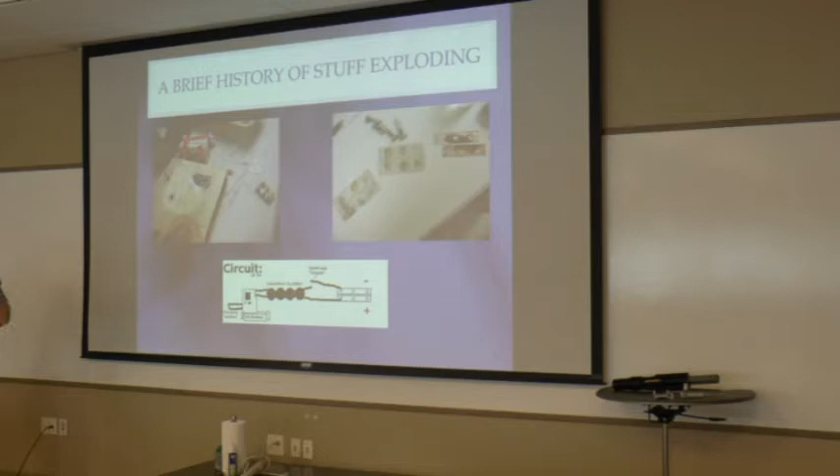A brief history of some of the stuff I've done: my interest in railguns actually started back in high school. I made a little physics demo out of a couple disposable flash cameras, some pieces of copper, a flash charging circuit, and some AA batteries, and it shot a little piece of aluminum foil out. That was my first railgun, I guess.

This probably won't play, but if you click it, it should play the video. Yeah, there we go—you can see it shot a little piece of aluminum foil and knocked a piece of paper over. That was off of a AA battery and about 9 joules of energy.

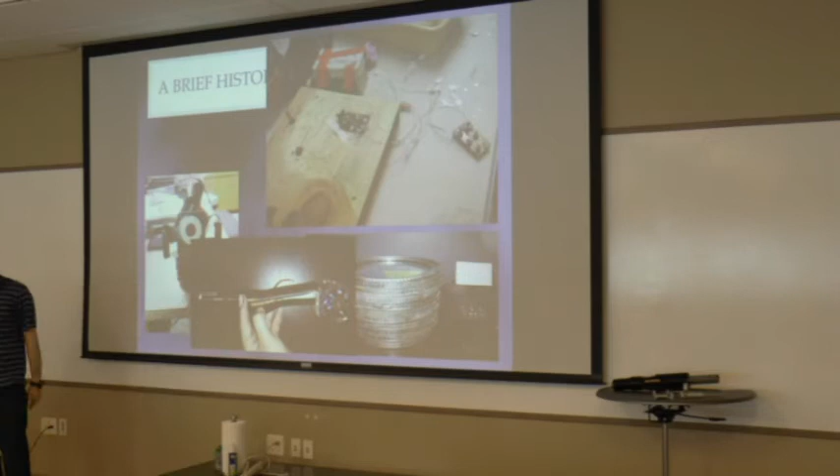So I did that, and some other projects. I did a little inductive charging thing so you can charge your phone while you're driving. I made some of the first LED headlights for a car using a weird thermal management system. I also made some little art projects, compressor mirrors, stuff like that.

I also made a rocket engine for Discovery Channel, as well as some composite materials I developed for one of their shows—they were making a man-portable bunker.

I also did some stuff at the Naval Postgraduate School. I made a wireless mesh network that was wearable. It had a computer in it that would monitor your heart rate, body temperature, and a bunch of other stuff, and it created a wireless mesh network so you could transmit your vital signs to other people wirelessly, even with no cell coverage or radio signals, because it was extremely low bandwidth.

I also came up with a wearable battery. It uses electroconductive Velcro, so essentially all you do is take the battery, slap it on wherever the terminal is with the electroconductive Velcro, and it just runs.

I also did some work for AFRL on novel solid rocket propellants. We took some nanoparticles that reacted with light and used that to make one of the first restartable solid rockets—a solid rocket that you can start, stop, and then start up again. There's actually a video if you want to click that little button.

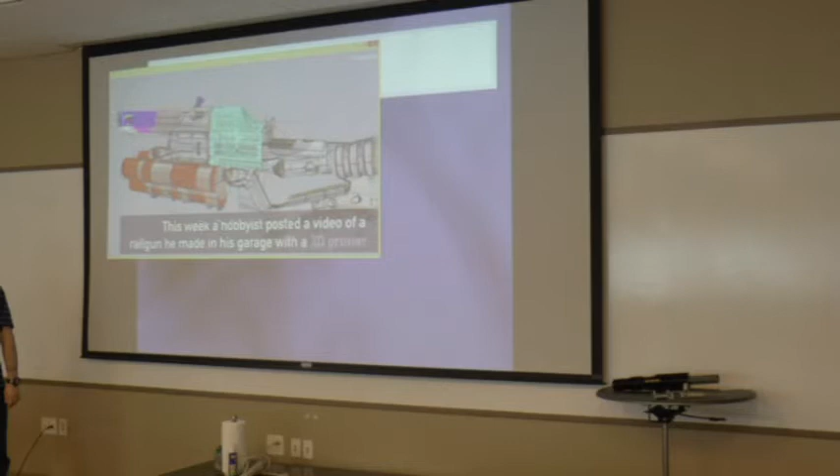Fire aluminum, graphite. I actually did tests with iron, tungsten, and non-conductive materials like Teflon, so it can fire anything. I can even push it. Let's just repeat it. Yeah.

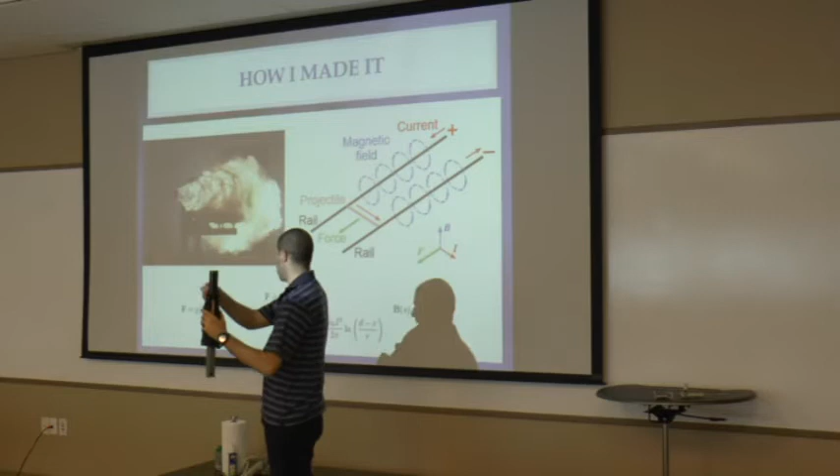Okay, so I'm not going to go into the math, but I'll explain how it works. Essentially, what you have - and this is the new version of the thing, so I apologize for it not being exactly what you saw in the video - but essentially what you have is two parallel rails, and you run a current between them. That current creates a magnetic field. And the interaction between the magnetic field and the current running through the rails and through the projectile creates a force. It's called the Lorentz force.

And it accelerates the projectile pretty much as fast as you want to go, because there's no limit on how much energy you can put into this. It's just how much energy you have stored electrically.

So the Navy, in their designs, had as much energy storage as they ever wanted. They could put a ship's worth of energy into this thing. But for a portable design, it's all about efficiency - getting the most bang for your buck. You only have a certain amount of energy you can store based on the efficiency of your capacitors. So you need to figure out a way to get the most force out of that specific packet of energy.

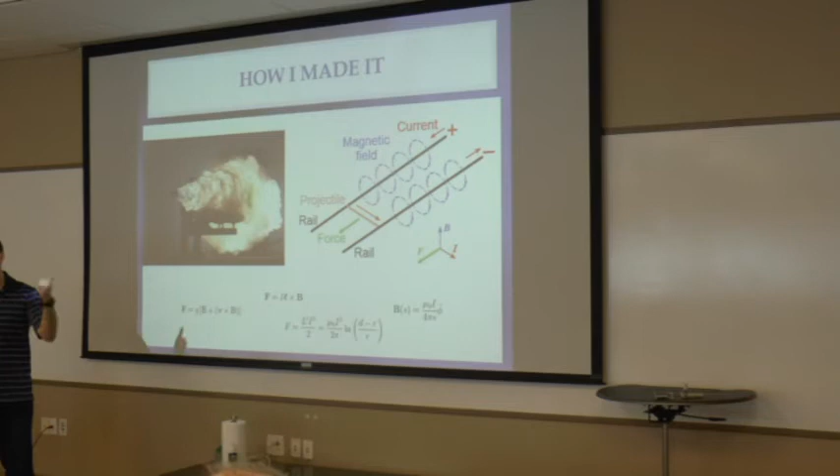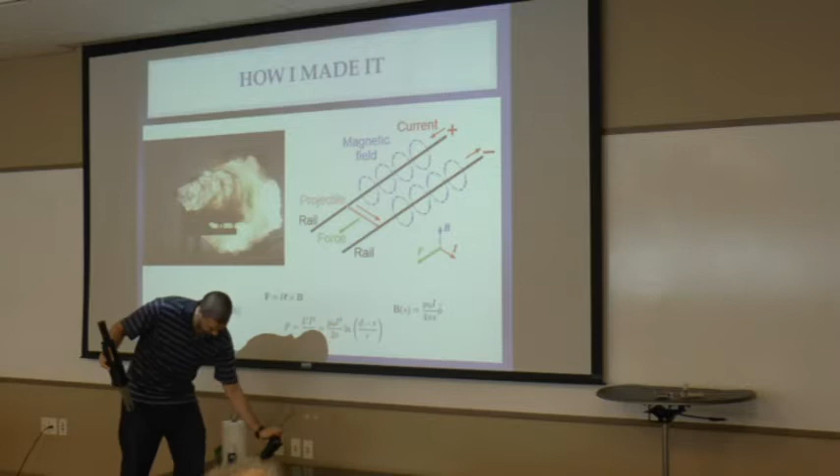So the way you do that is you augment the field. Instead of having just the rails creating the magnetic field, you have an external magnetic field - here you have 4 magnets. Essentially this creates a linear B field around the rails, and that allows you to get a much more efficient rail design. That allows you to make a portable railgun.

So how I started this thing was I submitted a white paper, because originally I was like, I'm not going to do this just on my own. I'm going to ask for funding and see what was going on. So I submitted a white paper. I said, here's how I'm going to build it, here's what I want to do. And if you look at how it developed, it actually worked pretty well - it came out pretty close to how I thought it would work. I'm not going to go too much into that, but the people I submitted the white paper to said, no, we're not really interested, we don't think you're going to be able to do it. So I was like, all right, I'll try it anyway.

So here's actually what I made, and here's how it works. I'm going to talk about the rails. This took me about 6 months to get it right - 6 months to figure out how to make just this part. Very difficult.

And I originally went with a 12-inch rail because I was like, all right, bigger is better, longer rails - what's cooler? But no, that's not how you do it. You have to match the length of the rails to the amount of energy you have stored. I also found out manufacturability is a big problem - you can't just machine stuff into any shape you want. You have to think about how you're going to manufacture it.

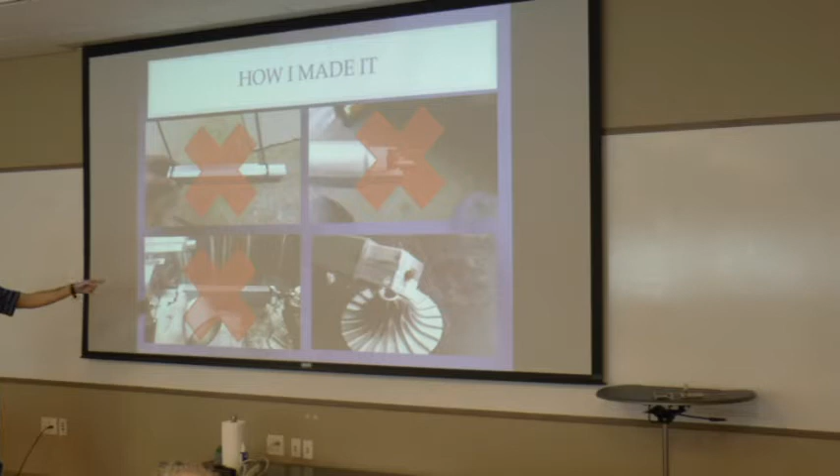So originally I wanted to go with a circular thing, and it turned into a square because I couldn't figure out how to do a circle. But eventually I got it to work. I found out a lot of ways that it didn't work, especially duct taping a thing on the lathe and trying to turn down a thing tied together with duct tape - it's not good for lathes.

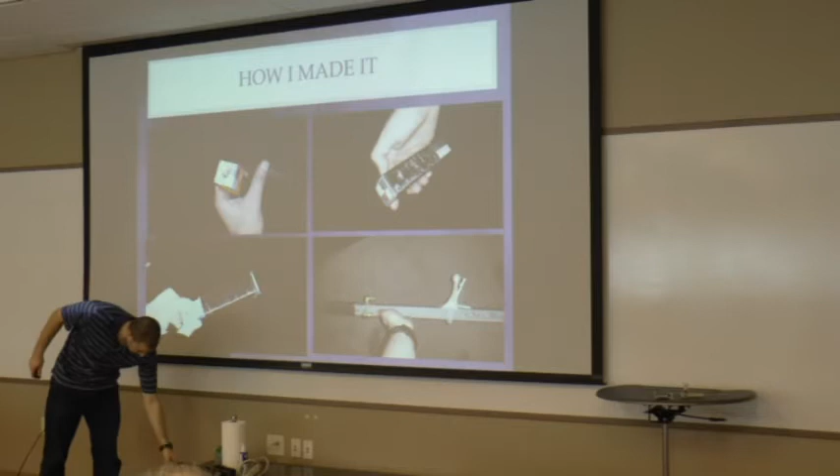So this is how it eventually came out. I got the rails working, and then I wrapped it with carbon fiber to reinforce it so these things didn't fly apart as soon as I fired it. And then I put all this into a big Garolite tube, big fiberglass tube, and that created the bolt loading system.

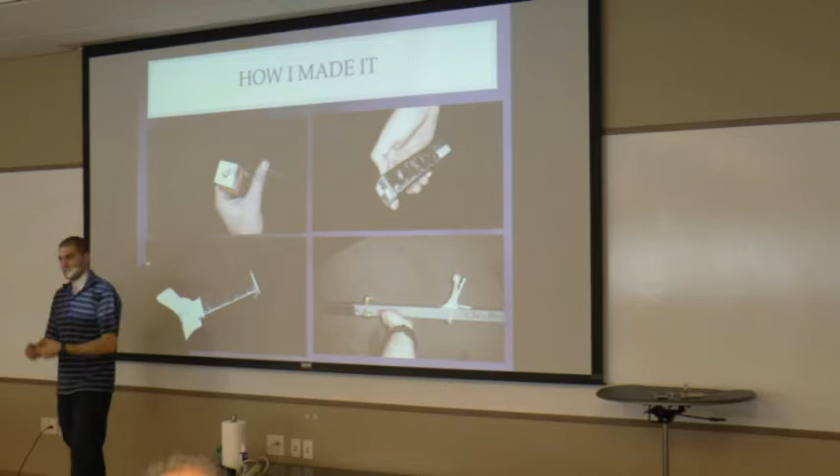And the way you get the energy in, at least in the first version, was you have these big pneumatic connectors. They're just brass pneumatic connectors, and they conduct electricity really well. They form a really, really tight connection with whatever conductors you're using.

So the electronics - this also took me about 6 months to figure out how to do this. And I'm not an electrical engineer, so it's kind of messy. Yeah, I'm not good at electronics, and I shocked myself a couple times doing this. But eventually I figured out how to do it.

Essentially how this version worked was I had a 12-volt battery, just a 3S LiPo battery like you use in an RC car. I ran that through a little mini inverter, like something you use in your RV but really tiny. Then I took that mini inverter and ran it through a CRT transformer, an old one, stepped it up to 1500 volts, rectified that voltage, and fed it into the capacitors to charge them. It's not perfect, but that was the best I could come up with.

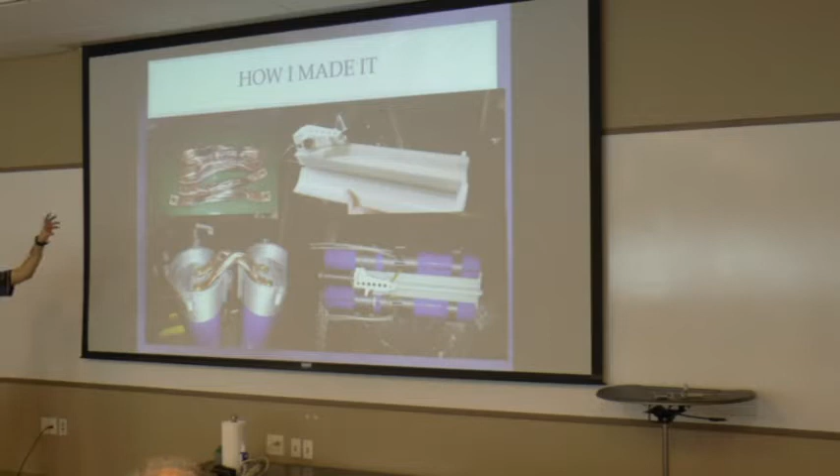So energy storage was another big challenge. Didn't take me quite as long to figure this one out, but there's only so much energy storage you can hold, since you're limited by weight. I had to figure out a way to get 6 big, huge blue capacitors into something portable, and I used 3D printing to do that. I made this little holder, made some flexible bus bars, and made sure all the wire gauges matched up, and this is what came out of it.

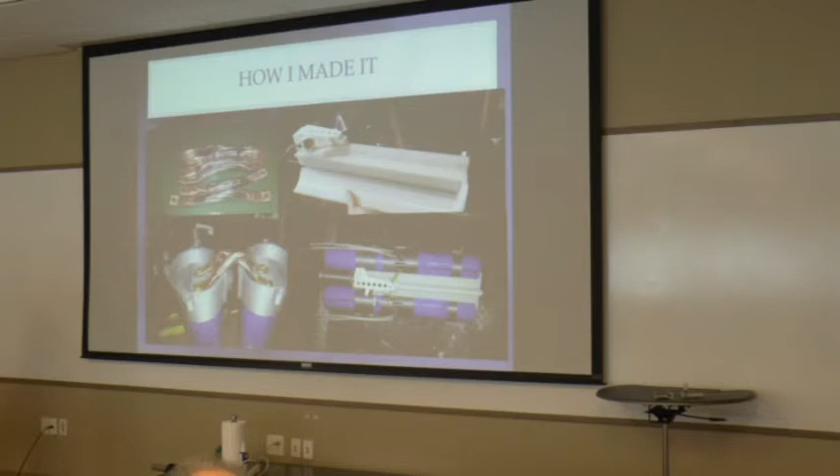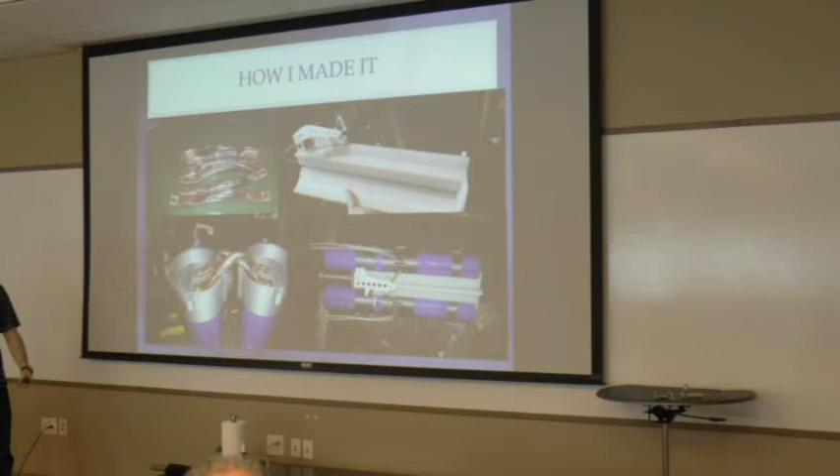This little section up there is actually an emergency discharge SCR. What that does is, if something goes wrong and the thing doesn't fire and you're left holding a fully charged capacitor bank that you don't want to be holding, you press that little button and it dumps all that energy into a resistor, making it safe again.

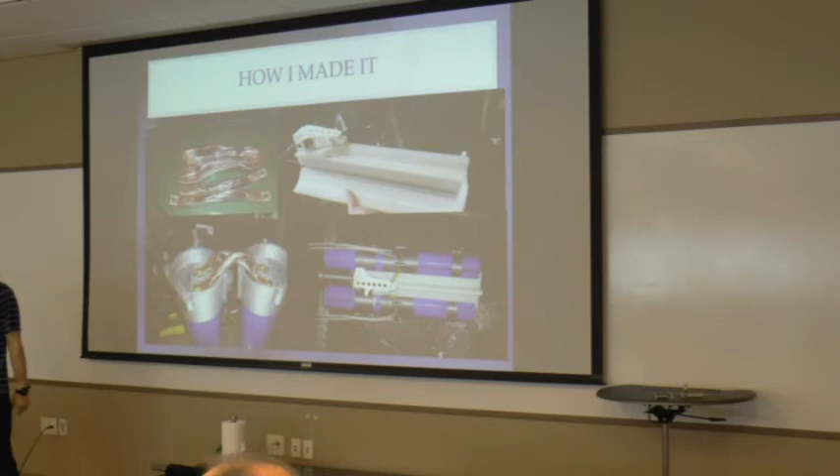And the structure, this was actually the most interesting part, because when I first posted this online everybody said, oh it's not really 3D printed, you used a mill and a lathe. But really, there was no way for me to make this portable without a 3D printed structure. You could do it without 3D printing, but to do it cheaply and do the number of revisions I had to do, there's no way you could have done this on a hobbyist budget without a 3D printer. There's just no way.

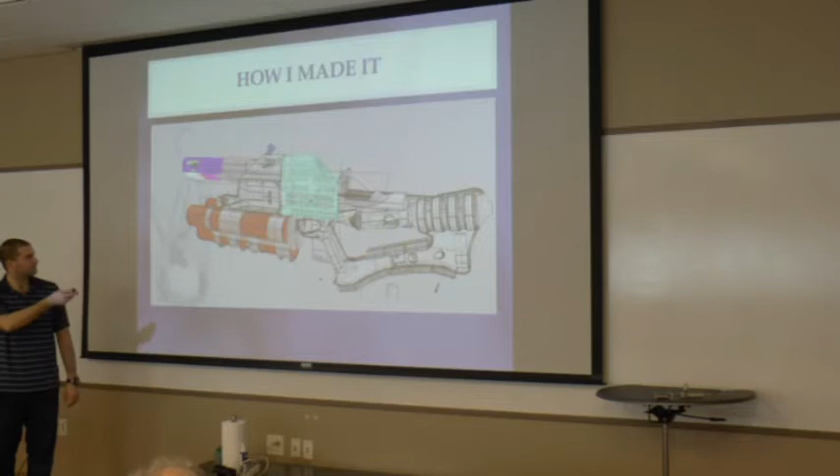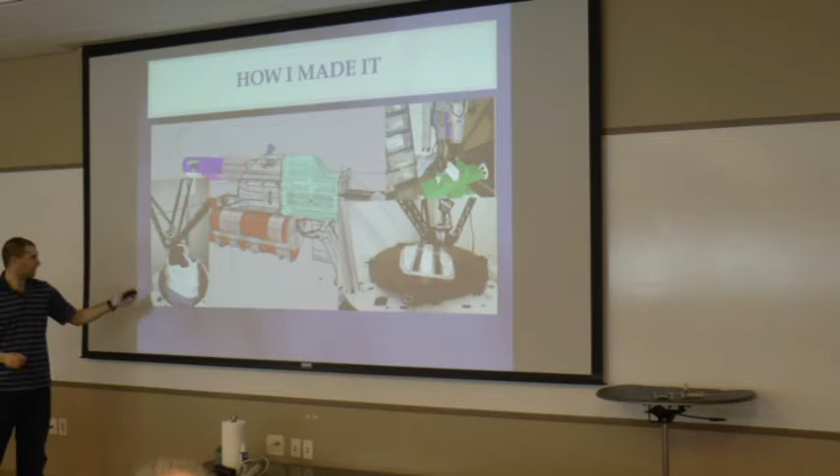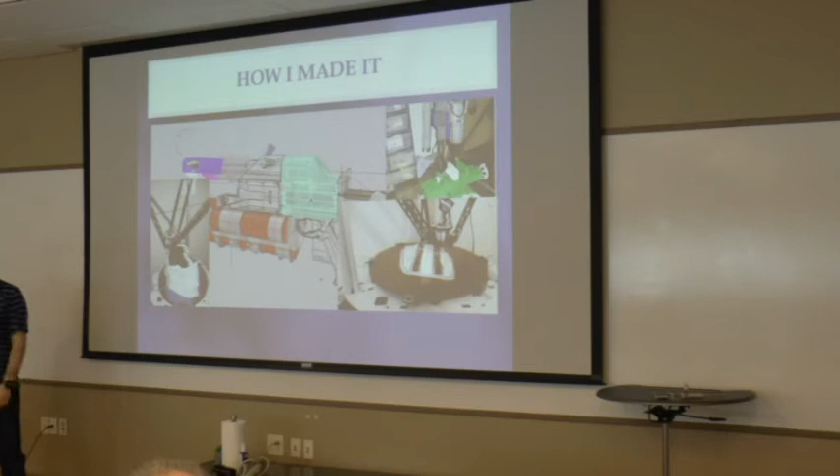So you came up with a CAD file, and to get that CAD file to a printed object I had to come up with a number of new techniques. I did this on a budget and didn't have a heated chamber, and if you're printing ABS parts you kind of need one. So the way I got around that was I took some insulation and wrapped it around the part as it was printing to keep it warm so it didn't crack. That worked actually pretty well.

I also needed to print some very weird geometries that didn't like to stick to the build plate very well. So I did some research and found out PEI, polyetherimide, is a type of build plate that works really well, it makes plastics really stick to it. I went and got one of those, and it worked. That's how I was able to print complicated geometries without a heated chamber.

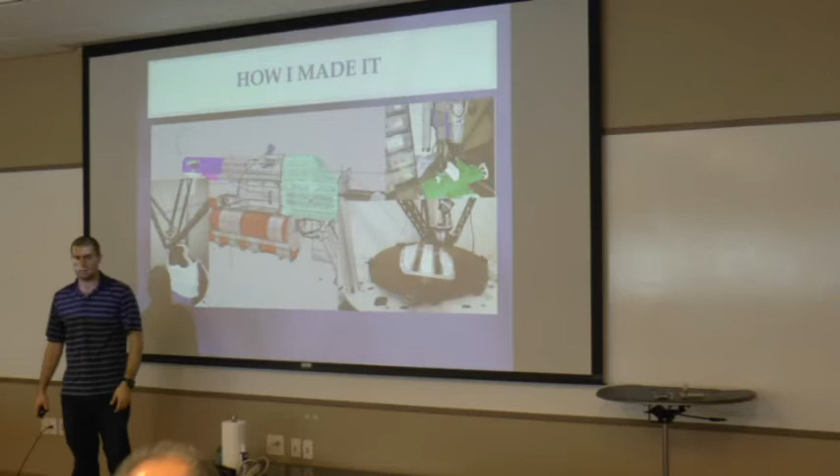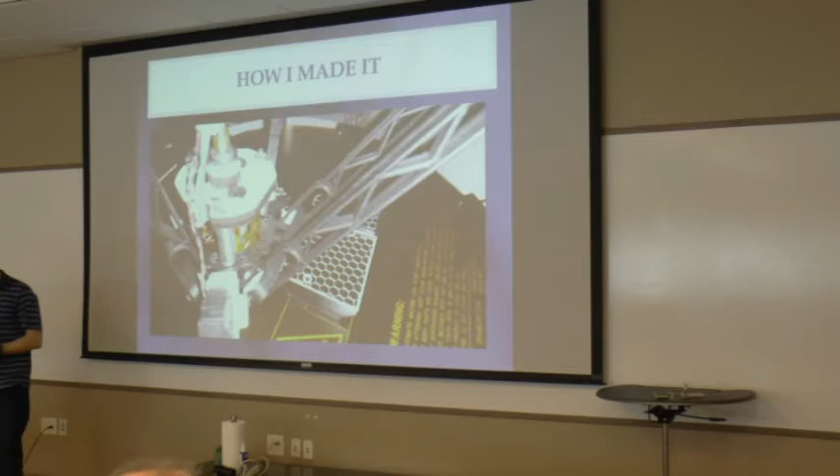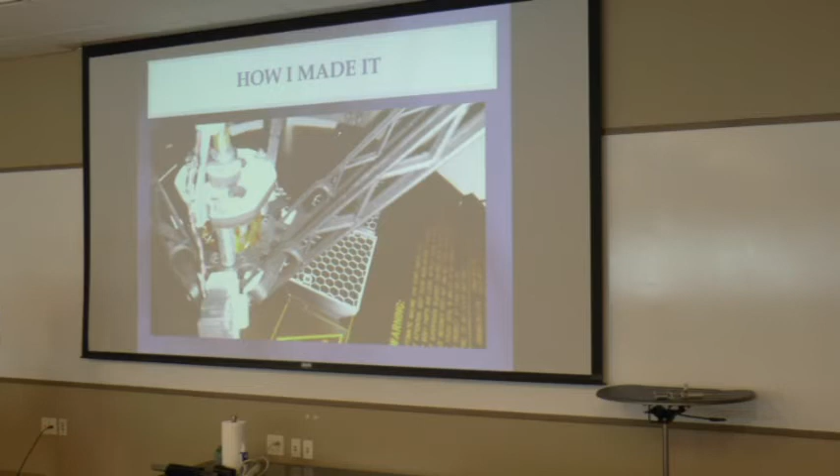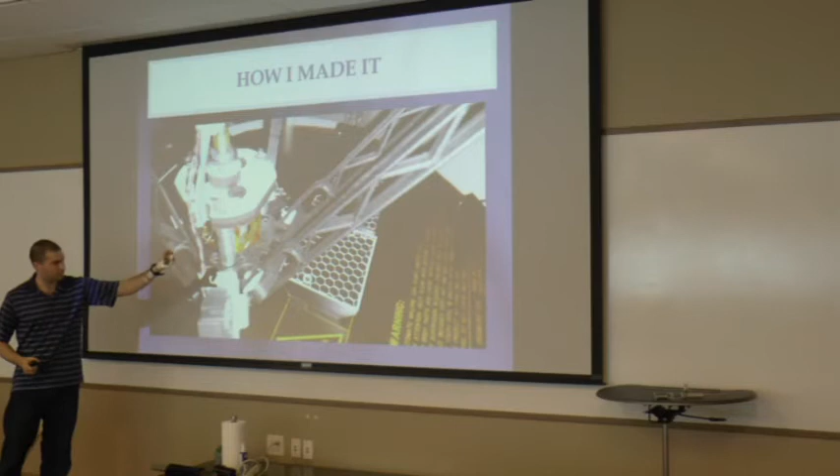Finally, I 3D printed my own mini milling machine so I didn't have to use a milling machine as much. Lastly, I figured out how to use multiple spools of filament to make parts, because some parts use more than one spool. 3D printers don't like to pause, they don't do it very well because of the way the software works. So if I wanted to use multiple spools, I'd make the infill small enough, and while it was printing the infill I'd quickly swap out the spools so it wouldn't lose a whole lot of strength. That worked fairly well.

So some lessons learned about the 3D printing aspect: you should have a standard fastener template, a standard template for how many fasteners you're going to use, part clearances, and then some general stuff about additive manufacturing. For the whole design I only used 4 types of fasteners, and you can make it work if you have a standard fastener template.

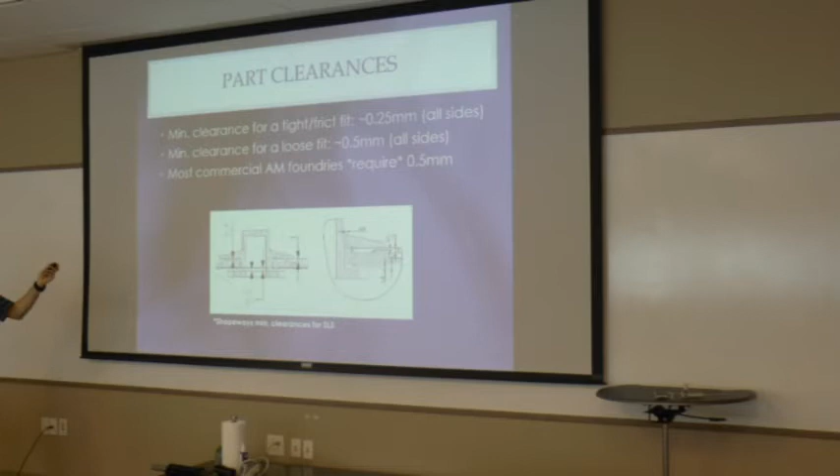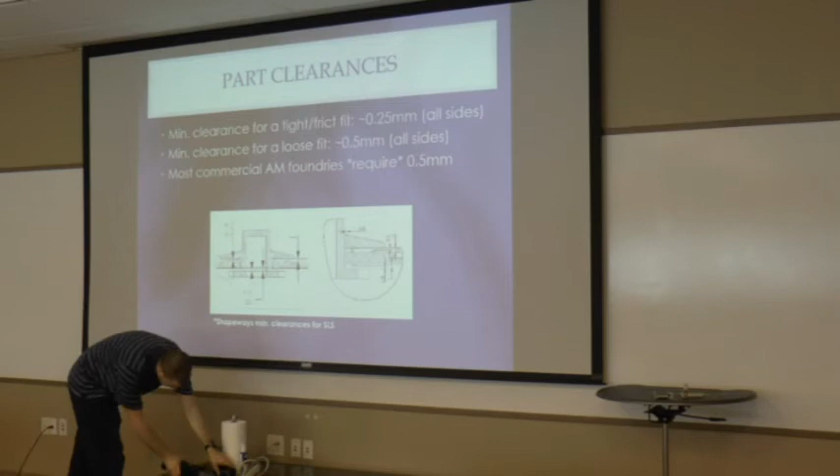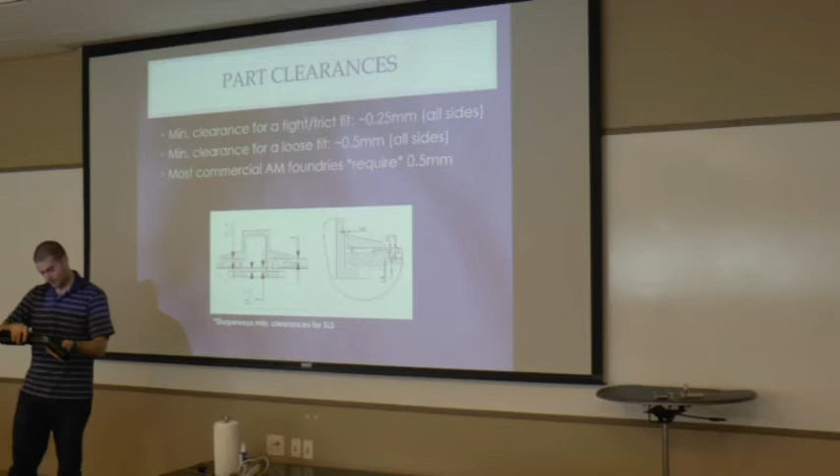For using screws and bolts and other stuff in 3D printed parts, you want to have proper clearances. SolidWorks doesn't do this very well, that's why I used Rhino, because you can do these clearances really easily. If you just have a hole as big as the part you want to put in there, it's not going to work, it'll scrape against the sides. So if you have 2 mating parts, like holes on this thing and dowels on this thing, you have to oversize one and undersize the other so they fit, otherwise it won't go in.

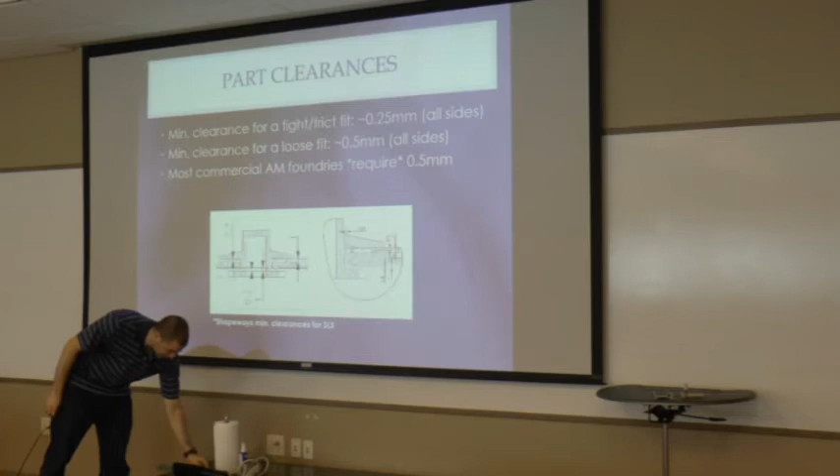What I found was, essentially, you just want to have the clearance be some multiple of the nozzle diameter to get you the right clearances. So I used the nozzle diameter for a loose fit and half a nozzle diameter for a tight fit.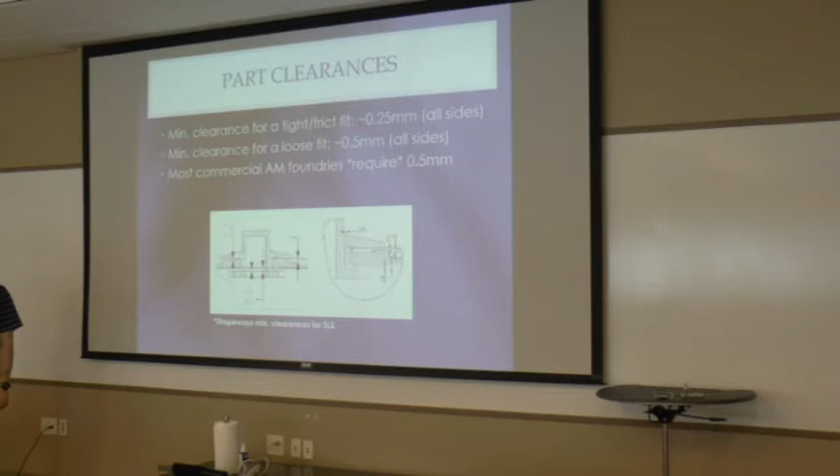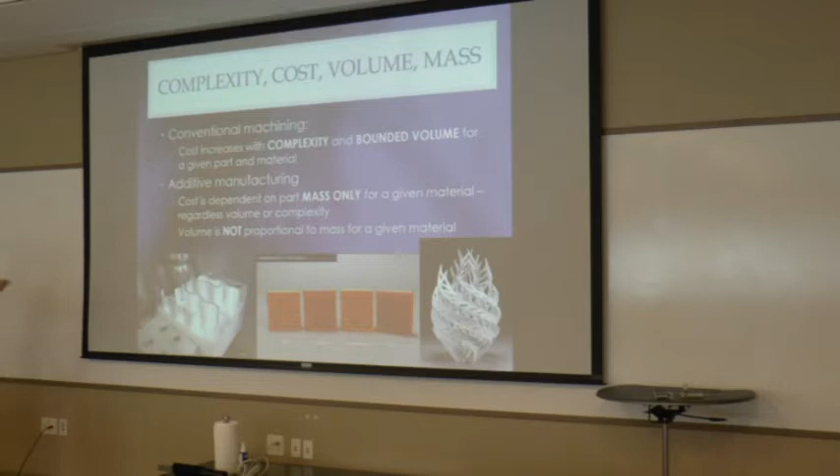I'm not going to go too much into this, but this essentially just highlights the benefits additive manufacturing gives you as far as regular manufacturing.

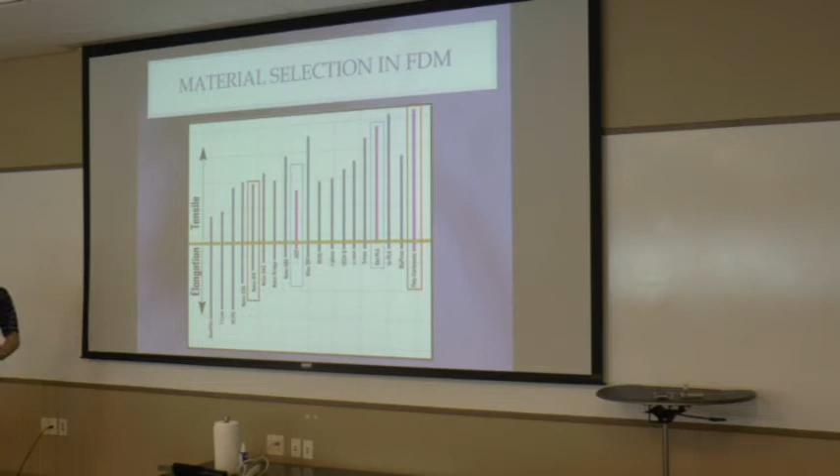Here's some of the materials I used: nylon, polycarbonate. I printed a few parts, but only for specialized stuff. Then it was mostly ABS and PLA.

What was the weight of the working prototype that we saw in the video? That weighed 45 pounds. Yeah. So it was not light.

Did I also see there was like a CO2 or a gas canister? What's the purpose of that? So what that does is, when you make a railgun, essentially what you're doing is you're passing thousands of amps through a very small part. And when you pass thousands of amps through something, it wants to weld, and if that thing is not moving, it's going to weld in place. So you need to give the armature, the projectile, some initial velocity before it gets that amperage. If you don't, it's going to weld. So the CO2 is to give it that initial velocity before it enters the rails.

Are you building more railguns or prototypes, or where are you going with all this? So this is kind of just a pet project, just a tinkering thing. It's not my full-time job. I am working on a version 2 just because I think it's interesting, and I think there's advancements you could make to the design to make it more interesting. But yeah, I'm just kind of playing it by ear.

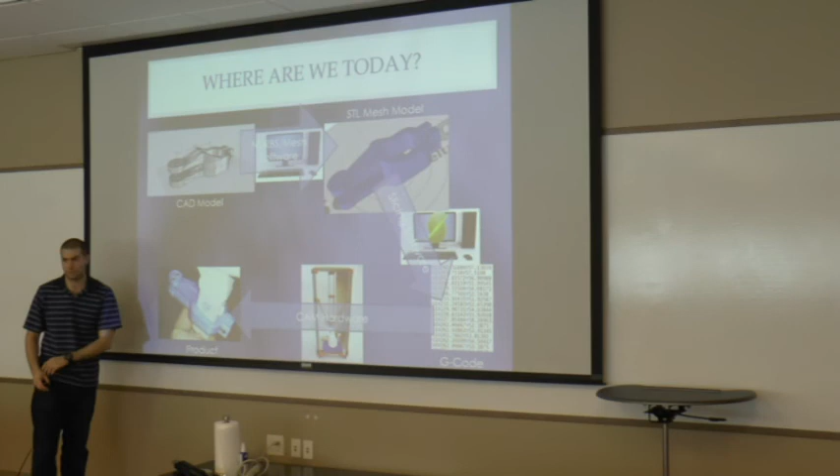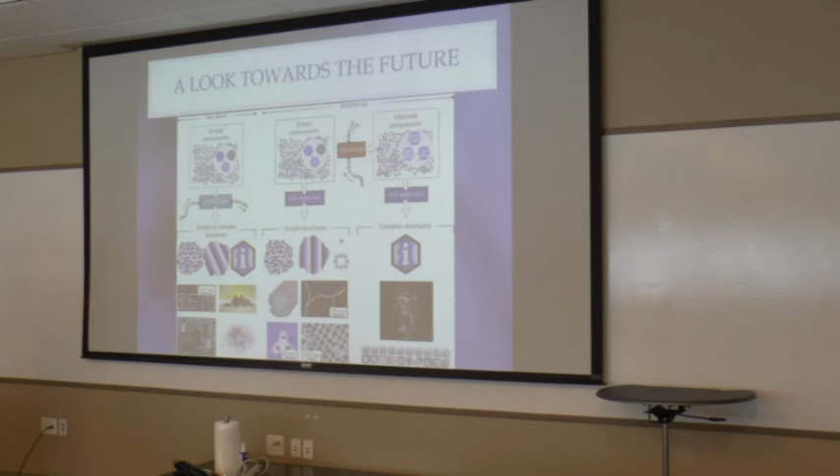So that's where we are today. Where I think we could be going is from an absolute positioning system to a relative positioning system - biomanufacturing, essentially. We're already seeing some of this: DNA origami, magnetotactic bacteria, in other words a way to get information into a self-assembling system, biobricks, and artificial photosynthesis, all engineered at the molecular level.

So you could do that using something like a system model. You have some differentiation engine, similar to the differentiation engine that's within our cells. It takes DNA and converts that into differentiated organs and tissues.

It's already wanted. Oh yeah. Then you have some sort of transcription engine that takes that organ model down to a protein model. And then you have G-code, some genetic code that's platform specific, and you make these seeds, and the seeds self-assemble.

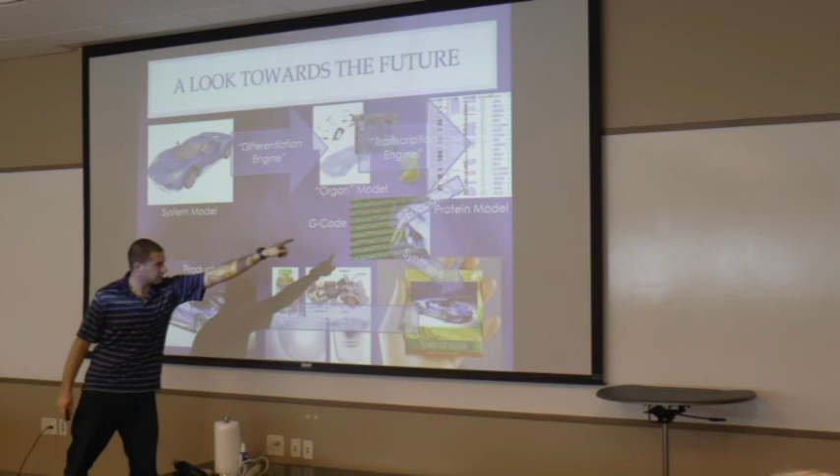And a lot of this isn't too far off. It sounds way down the road, but a lot of this is way closer than you'd think. There are parts we don't understand - that's a big mystery in biology, we don't understand that part. But this stuff, this is fairly well, we're there. And this, we're getting there faster than you'd think. So this model might not be too different from the model we currently have - it might not be too far off.

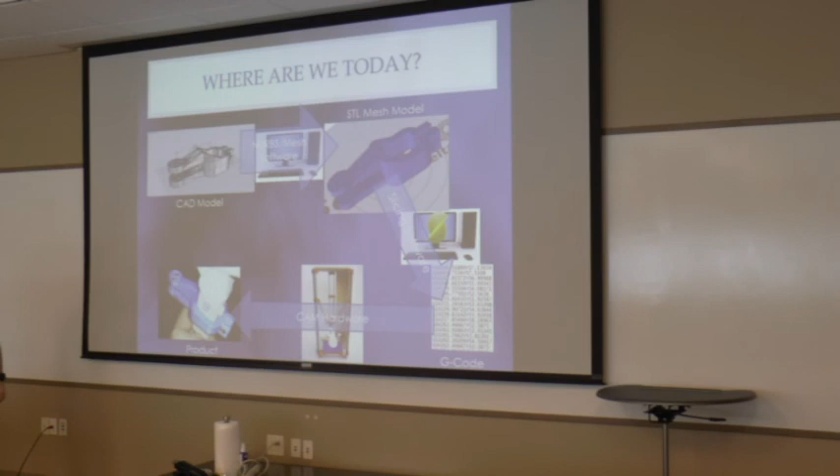So the material would have to be elements at that point in time, or not maybe necessarily - you break it down. Yeah, I mean, if you're already at the molecular level doing self-assembly, there's not much difference between breaking something down and building something up. Positive versus negative. Add current versus remove current. Add hydrogen ions versus remove them.

Yeah, this is where I think... So, yeah. Questions? How did we get from homemade railguns to synthetic biology? But yeah, that's pretty much all I have. If anybody has any questions.